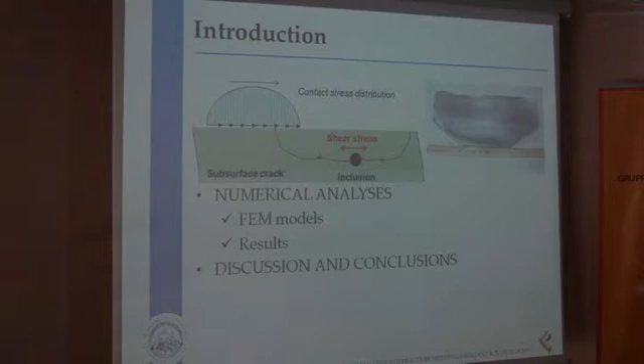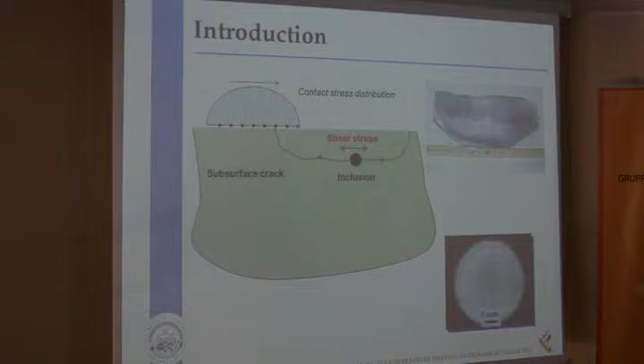Subsurface crack nucleation and propagation is typical of rolling contact fatigue phenomenon in hard steel, and in particular, crack nucleation is favored by the presence of inclusions like oxides and sulfides, while subsequent propagation happens mainly by shear mode, mainly mode 2 in this case, and is led by orthogonal shear stresses.

The crack can go for a long way before branching towards the surface and causing severe and sometimes catastrophic damages like deep spalling or case crushing.

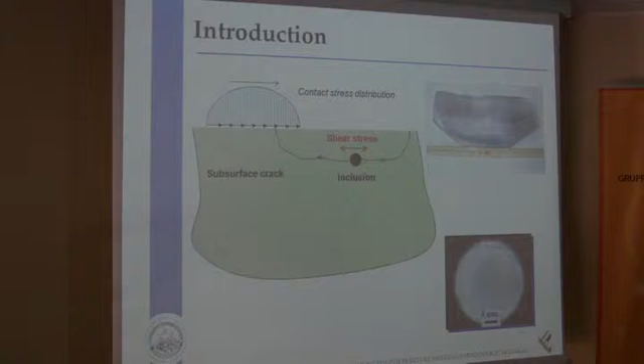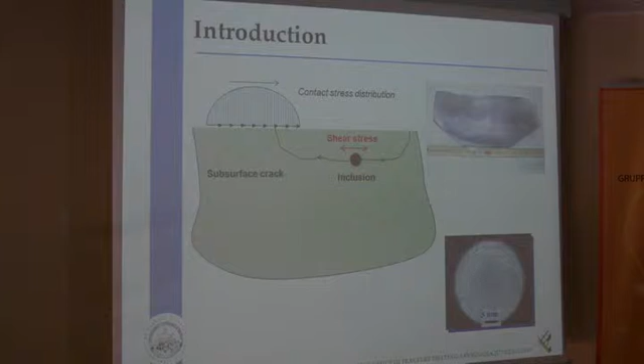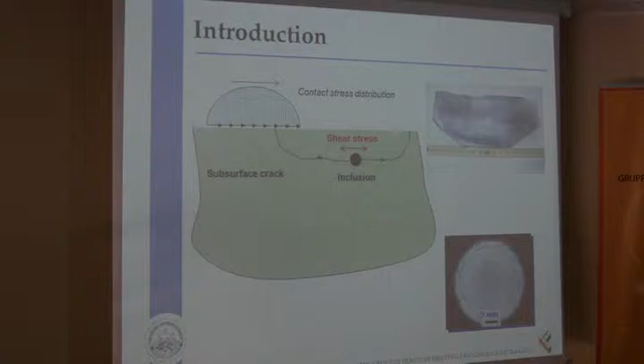So this is a phenomenon quite complex to study and very difficult to reproduce in the laboratory, because cracks propagated in mode 2 have the tendency of branching into mode 1. It's very difficult to study this phenomenon, and for this reason very poor information is available in the literature on this topic.

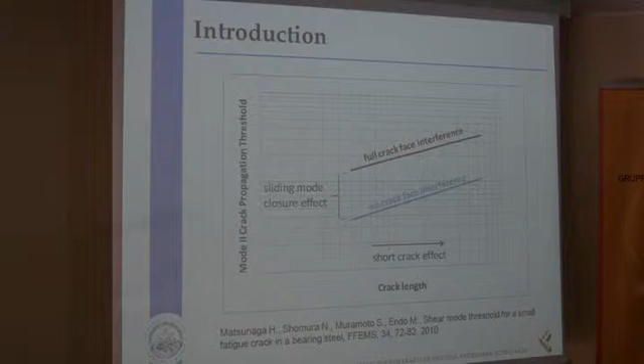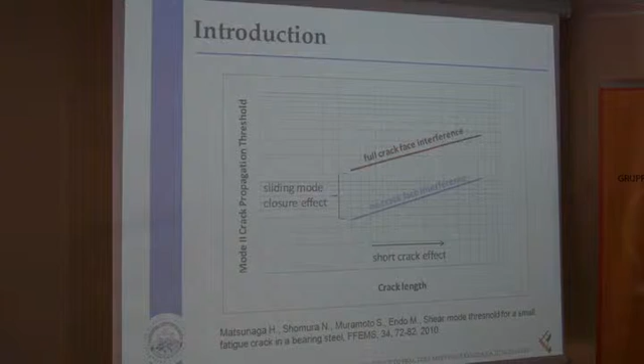Crack propagation is also strongly affected by crack face interference, which causes the so-called sliding mode or roughness mode closure effect. This effect is able to significantly increase the propagation threshold because of the locking effect between asperities of the crack faces.

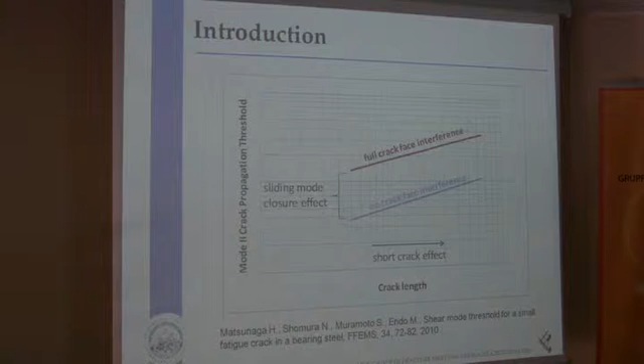And we remember that crack propagation threshold is also affected by the short crack effect, that is the dependence on crack length.

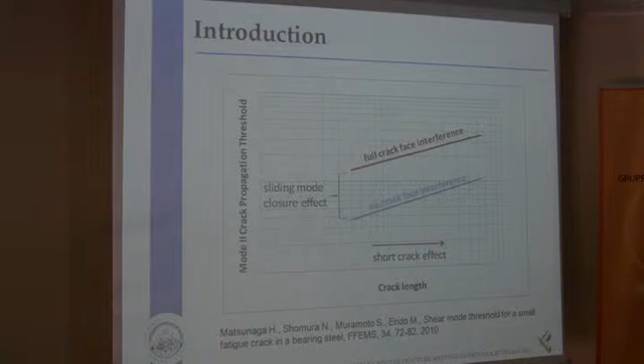The investigation was carried out on ring specimens which were the object of a rolling contact fatigue test campaign, made on typical steel for gear production. The test conditions of the specimen were pure rolling, contact pressure of 2000 megapascal, and about 800,000 cycles.

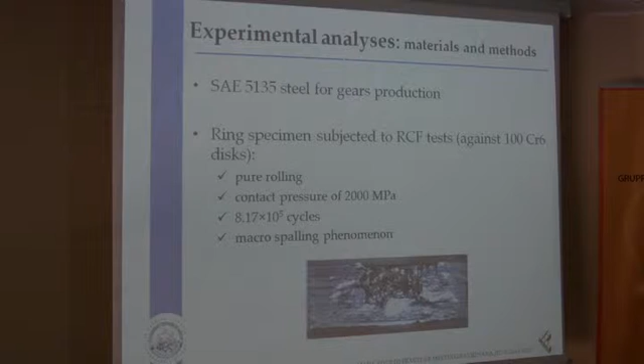Afterwards, macro spalling phenomenon happened, which is reported as an example in this picture. After the test, the specimen was cut along its transversal section and examined by optical and electron microscope, in particular looking for subsurface cracks different from the main one, different from that causing the macro spalling, in order to study the damage evolution at an intermediate state.

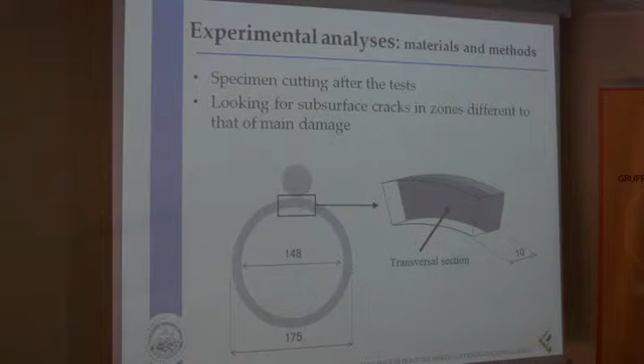We found different subsurface cracks, and this is a significant one, representative of the behavior of the other cracks as well. We can note it's a quite long crack, about 3 millimeters, and examining it in detail we can note some particularities.

The first one is faceted fracture morphology, which is typical of shear propagation, especially near the crack tip. Another peculiarity is that the crack opens gradually from the tip to its central zone, and in the central zone the gap reaches a few microns.

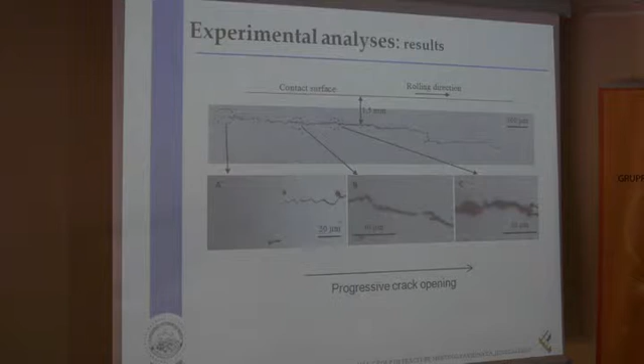Another aspect is the presence of several microparticles entrapped between crack faces, which act as third bodies in the wear phenomenon between the crack faces themselves.

This picture shows in more detail the phenomenon of microparticle origin. We can note an incipient detachment of these particles from the crack faces, interfering during cyclic contact, and also the typical wavy aspect of the crack.

On the right, we can note the same phenomenon in a more advanced state, where the microparticles are almost completely detached from the surface of the crack.

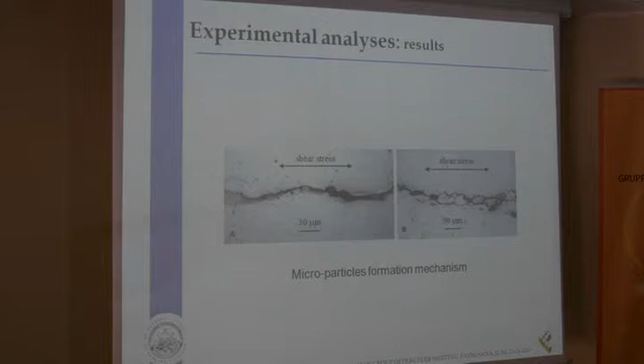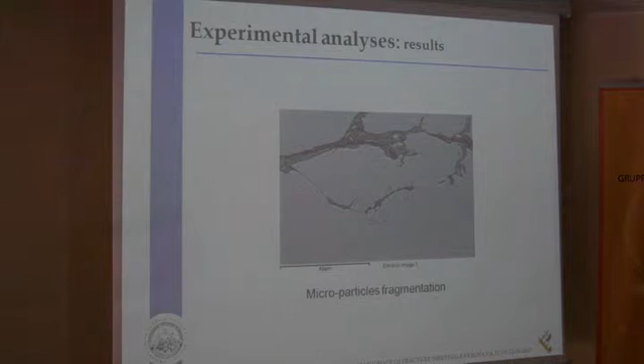In some regions, these microparticles were also further fragmented and appearing like a sort of gray band between the crack faces. It's interesting that this phenomenon was also observed by Matsunaga during a torsion test on bearing steel.

The ring was finally broken after immersion in liquid nitrogen to observe its fracture surface, on which evident sliding and flaking phenomena were observed, which are typical of sliding mode propagation.

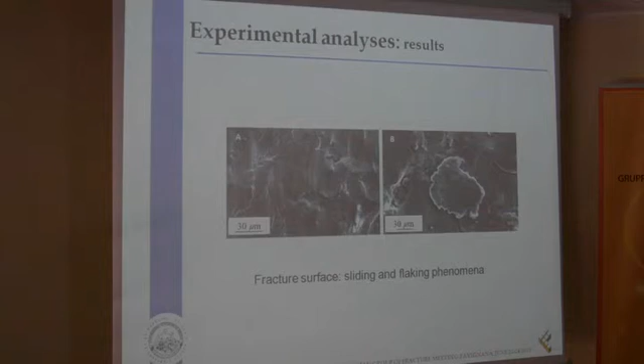So, to summarize the experimental evidence, we can make some comments on the crack closure phenomenon and its evolution under cyclic shear stresses. We saw the microfailures of the contacting material layers and consequent formation of microparticles, which act as third bodies in the wear phenomenon between crack faces, and sometimes are fragmented into a finer microstructure.

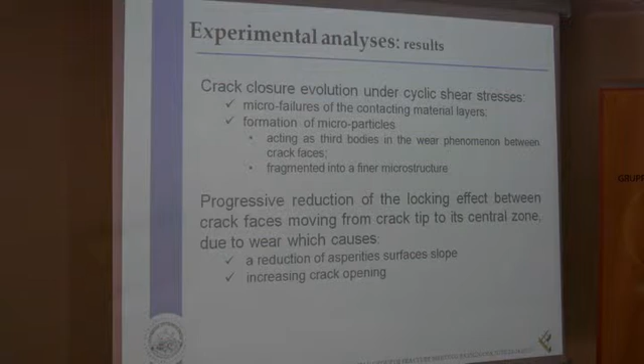As a consequence, we noted a progressive reduction of the locking effect between crack faces, moving from the crack tip to its central zone, due to wear, which causes a reduction of asperity surface slope and increasing crack opening.

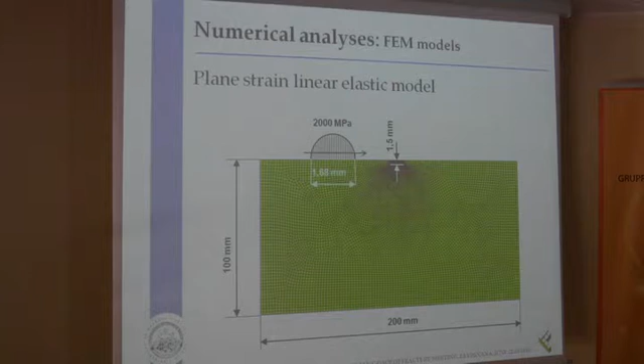Numerical investigation was carried out on the same component in order to better understand and describe the phenomenon of crack propagation, in particular the effect of crack faces interference. The model includes a subsurface crack under the action of a moving Hertz pressure distribution, which simulates the cycling rolling contact action.

Different finite element models were developed for the same. A first one is shown in this picture, a uniform pattern crack front model, which means that the crack is modeled with a faceted pattern with teeth having constant slope along the crack.

The crack was modeled independently and then tied to the body with multi-point constraints condition. Crack tip was modeled by quarter point technique, and the stress intensity factor was calculated by displacement field with the crack tip.

Unilateral contact with friction between crack faces was assumed with a value of 0.25, and several analyses were carried out changing teeth slope and crack length.

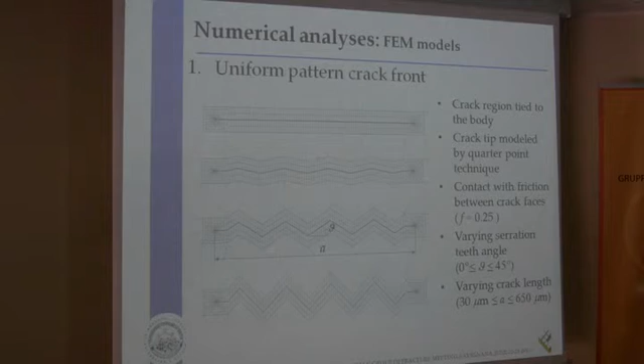Another model considers non-uniform pattern crack front, which means that the teeth slope changes, in particular reduces, moving from the crack tip to the center of the crack, in order to reproduce what we noted experimentally. We schematize for this aim the crack in different regions having different teeth slope.

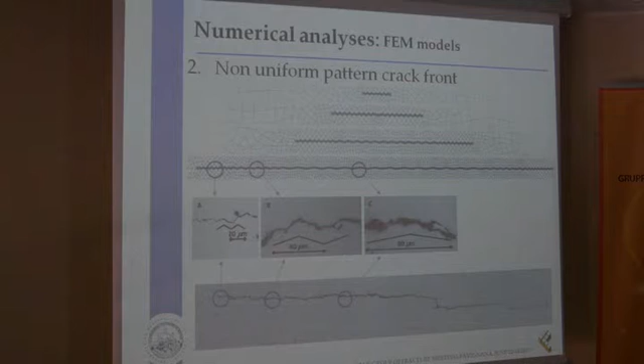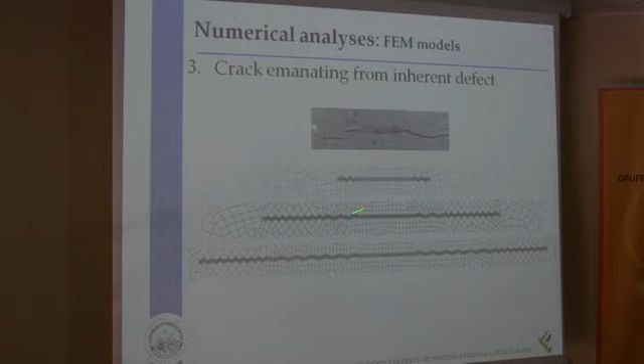Finally, a third model was developed, which was a variation of the previous one, also including a central flat region, simulating the presence of an inherent defect, an inclusion, which was modeled as a persistent crack according to the Murakami approach.

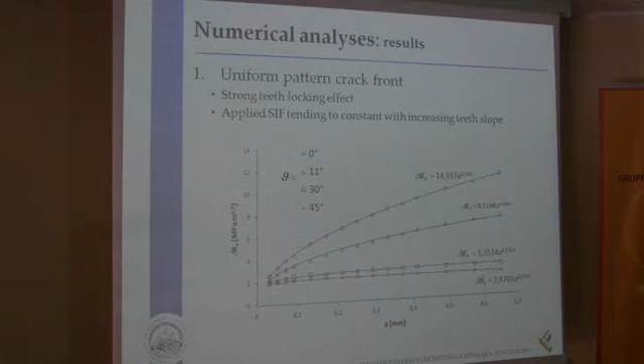In this picture is reported the results in terms of applied stress intensity factor, mode 2, for the constant slope models, which show a very significant effect of this parameter on the stress intensity factor, which means a very important locking effect.

But also for longer crack, the curve remains quite low, which means that the closure effect is mainly due to the roughness near the crack tip.

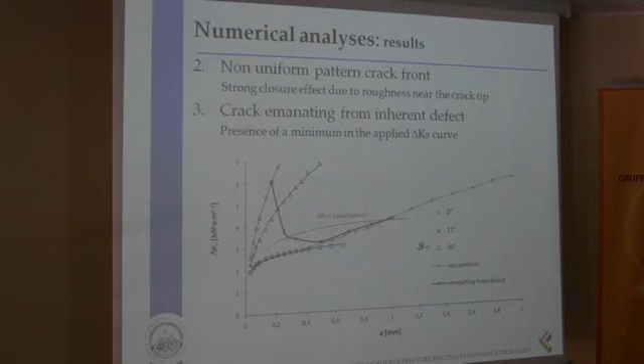Concerning the curve referring to the crack emanating from a defect, we note that it starts from a higher value due to the presence of a flat crack, then it decreases rapidly, tending to the non-uniform pattern crack front. This curve presents a minimum, which means that if the applied stress intensity factor falls below the propagation threshold, a crack arrest is predicted by this law.

But wear is supposed to act also on arrested crack by smoothing the asperities between the crack surfaces during the contact cycles, then increasing the stress intensity factor, and if this reaches the propagation threshold again, the crack is further allowed to propagate for a step, but after this step, new rough regions appear at the crack tip, so the stress intensity factor is again decreasing, and so on.

So the crack is expected in the first stage of propagation to grow by subsequent stop and go until it becomes large enough to propagate in a continuous way.

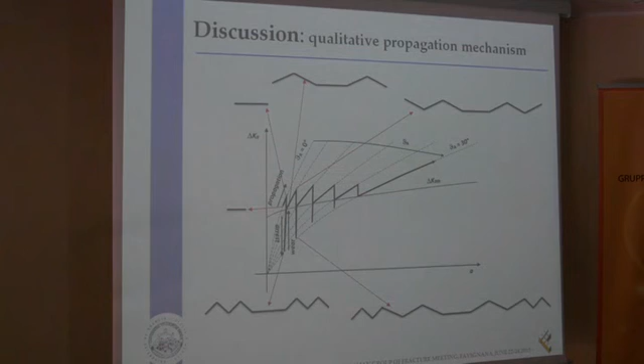So, coming to conclusion, we observed that mode 2 propagation of subsurface cracks is strongly influenced by sliding mode closure due to roughness interference, which progressively reduces the locking level between asperity faces, passing from the tip to the central zone of the crack.

Anyway, the effect of closure on applied stress intensity factors depends mainly on the roughness near the crack tip. Cracks emanating from internal defects can arrest after a propagation step due to the locking effect of the roughness, but wear can progressively reduce roughness allowing further propagation.

So all these evidences can be very useful to interpret the results of tests for determining shear mode propagation threshold, which is a very complex topic.